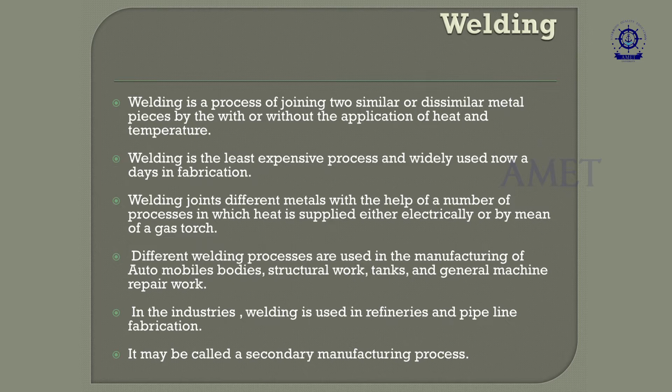As I already discussed, it is a very least expensive process and widely used nowadays in fabrication. Welding joins different metals with the help of a number of processes. Heat is applied either electrically, by means of a gas torch, or by means of a welding torch. Different welding processes are used in manufacturing of automobiles today, starting from gas welding, starting from arc welding, and nowadays there is a lot of advancement in welding taking place in automobile industries, nuclear industries, shipbuilding industries and space shuttle industries, which we will be discussing in this lecture.

Nowadays industries especially use welding processes like friction welding process and friction stir welding process, and mainly ultrasonic welding process, used in different oil industries and piping industries. It is one of the largest and major secondary manufacturing processes.

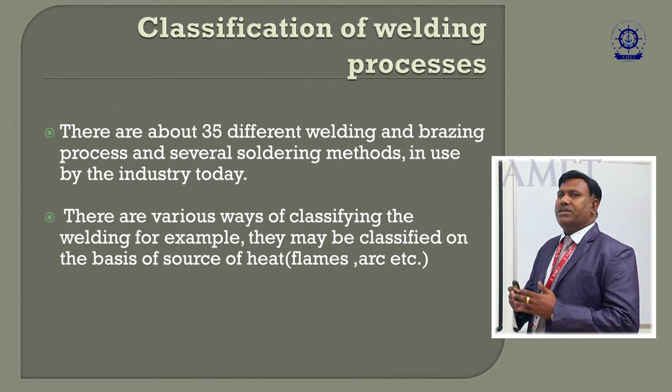If you consider the classification of welding processes, welding is majorly classified into 35 different welding and brazing types, and several joining processes like soldering are methods used in different industries. There are various ways of classifying welding, for example, they may be classified on the basis of heat sources applied. There is flame welding and arc welding used for industries, and in general there are different welding processes.

Gas welding is one major classification. We have air acetylene, oxyacetylene, oxyhydrogen welding, and separate oxygen and acetylene put together in the welding process. We get different flames by mixing oxygen with acetylene gases.

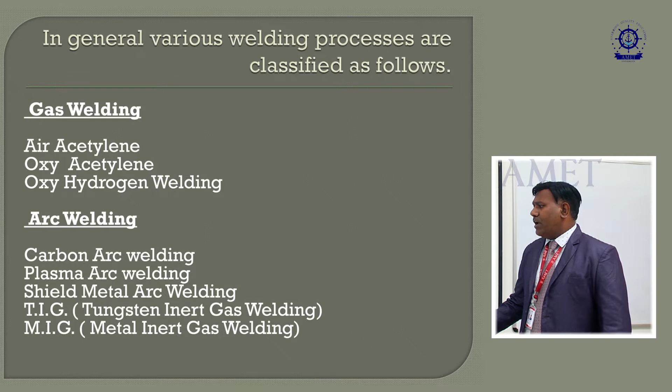Another major classification in welding is arc welding. We have different arc welding processes - let us see one by one. These are the major arc welding processes used in industries: carbon arc welding, plasma arc welding, shielded metal arc welding, and TIG welding. TIG stands for tungsten inert gas welding and MIG stands for metal inert gas welding. These two processes are widely used in different industries and in joining different non-ferrous alloys.

Next we have the major classification of resistance welding. Resistance welding comes under the category of pressure welding, and we have spot welding, seam welding, projection welding, resistance butt welding and flash butt welding. These weldings are used especially in automobile industries - for example, in automobile door industries and car door panels, spot welding is used.

The next major classification of welding process is solid state welding. This is nowadays used widely in all major industries. For example, we have cold welding, and diffusion welding is one of the latest welding processes in which joining of different types of non-ferrous alloys, ferrous materials, as well as plastics and other materials can be done. Forge welding is another type, along with fabrication welding, hot pressure welding and roll welding. Today we are going to discuss friction stir welding.

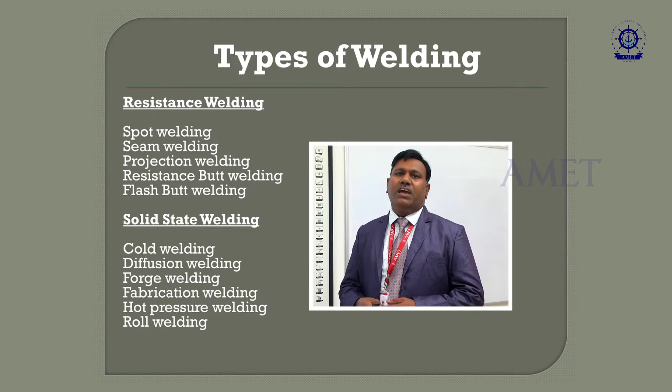Let us see another major classification of welding, which is unique and can be considered a special welding process. For example, we have thermochemical welding, which includes thermite welding and atomic welding. Thermite welding is used in joining railway tracks, where men work under the tracks making a weld with a cone shaped mold where aluminum and iron oxide is put together and fused, allowing heavy sections to be joined together.

Another welding classification is radiant energy welding, which has two major types: electron beam welding and laser beam welding. These two types are very important in industries nowadays, because laser beam welding allows you to weld even very thin sections of plates with very little thickness. Other applications of laser beam include different medical applications, including human surgery.

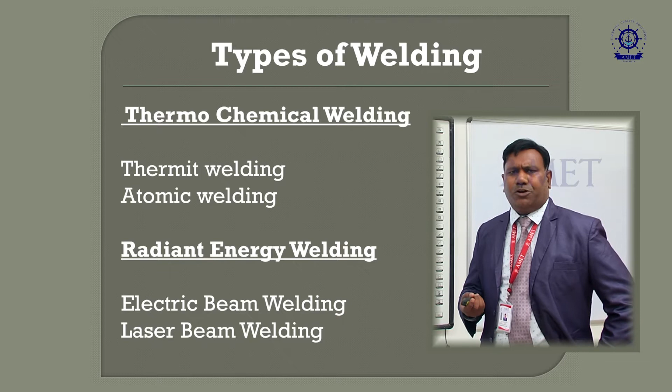We will now see the different welding joints used in industries nowadays. For example, in normal butt welding, we put two plates together and make a weld. It's normal welding used in different industries, and it is a major type of welding joint.

And we have a lap joint. What is a lap joint? It is nothing but placing two workpieces one over the other. This is called the lap joint, which is used in industries. And we have a corner joint, where you put pieces together and make a weld over the corner.

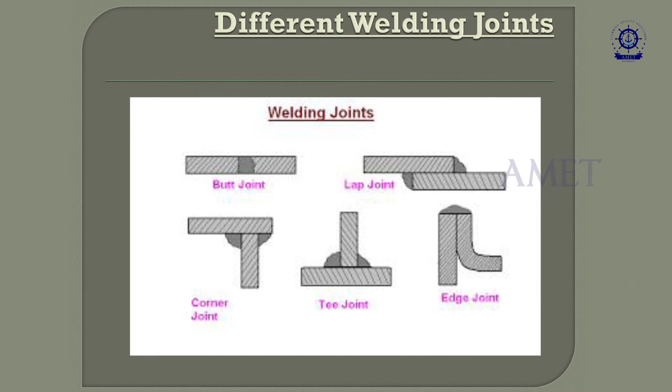And what is a T joint? A T joint is this type of structure, which is welded and used in many manufacturing applications. And edge joint, as I mentioned, has a position like this, which can also be called a corner joint. These are some of the few joints used in industries.

There are other types of joints also used, but we have shown only a limited number in our presentation for now. Next I am going to discuss the different welding positions used for different applications.

For example, flat welding, which I discussed, is like a lap joint where the workpieces are flat on the surfaces and you have a weld bead. So you have a single V groove and then you can make this flat welding.

This welding you can call vertical welding. Suppose you want to make the section to be welded in this position, this is called vertical welding.

You also have a number of welding directions. For example, forward welding, where you make the weld from top to bottom, and welding from bottom to top.

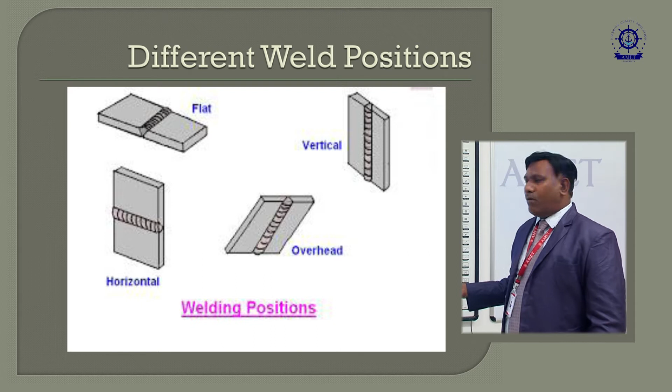We have a third position called horizontal welding, in which the welding starts from here and you move the torch from this place to that place. In some rare cases we use overhead welding, in which the operator has to weld on the top position of the structure. These are all the different types of welding positions.

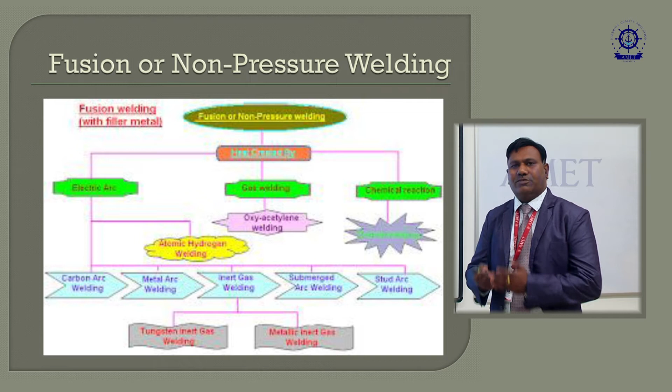Now we come to the main topic of friction stir welding. So far we've discussed the basic types of welding and the traditional classification process used in industries.

But nowadays a lot of improvements have been made in welding. For example, ultrasonic welding and diffusion bonding are promising areas that industries are looking into, because this is very important.

You can join without a filler rod, and it's an eco-friendly welding process where you don't face any arc glare, dust, or flames. There is no flame at all. It's a purely eco-friendly welding process, like a machining process where the tool penetrates into the workpiece and joining takes place.

Friction stir welding is nothing but a solid state welding process. What is solid state welding process? It is one in which the material does not reach melting temperature. Below the melting temperature, the joining takes place, which is called a solid state welding process.

It uses a non-consumable tool. We don't use a consumable electrode to join the workpieces, and without melting the workpiece you can join the material. Heat is generated by friction between the rotating tool and the workpiece material, which softens the region near the FSW tool.

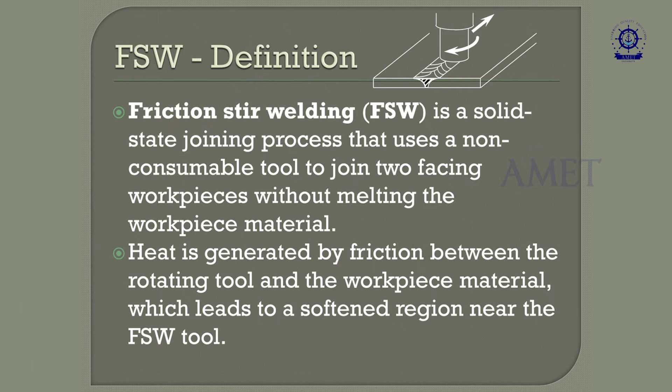For example, these are the two workpieces and this is the tool. We rotate the tool and penetrate into the workpiece, and then the tool moves slowly to make the joint over the workpiece, which is called friction stir welding.

With friction stir welding, we can weld different combinations of alloys, even when the temperatures of the two parent materials are different. So industries are trying different types of material combinations for joining, for example aluminum with copper, steel with aluminum, copper with steel, and different composite alloys are nowadays used for joining materials.

Even people are trying with the joining of polymers also. Polymer is very difficult to join because there is no proper technique for joining polymers available. So this type of friction stir welding and diffusion bonding techniques are very much useful for joining polymer materials.

So we will see what is friction stir welding. It is capable of joining aluminum alloys, copper, titanium alloys. Titanium alloy is a very hard material that can be joined even in this process of friction stir welding, and also mild steel, stainless steel, and magnesium alloys.

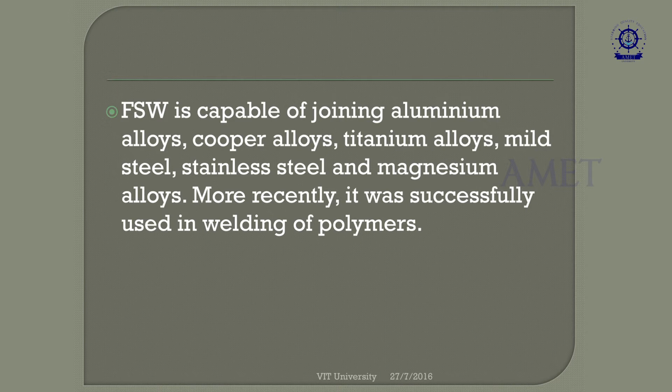And we have magnesium alloys also. Magnesium alloy has an ignition property, so that can be avoided. In conventional methods it's very difficult to make a joint, but magnesium can be easily joined by the friction stir welding process, and it was successfully used in different ways of joining polymers also.

In friction stir welding, the different parts to be joined are clamped firmly, because when the tool is penetrated into the workpiece it should not move away from the fixture. So it has to be clamped firmly, and a rotating hardened steel tool is used.

So here these are the two metal pieces, the parent materials. These parent materials are to be fixed and clamped properly on the fixture, and then a rotating tool member, say for example a mild steel or hardened steel tool, is driven into the joint and traversed along the joint line between the parts, as I already explained with the two parts in this lecture.

And the rotating tool produces friction with the parts. The friction will be made over the tool shoulder here, which affects the material like this. A weld bead can be formed over this region, which is nothing but the tool inserted over the workpiece, generating enough heat and deformation to weld the parts together.

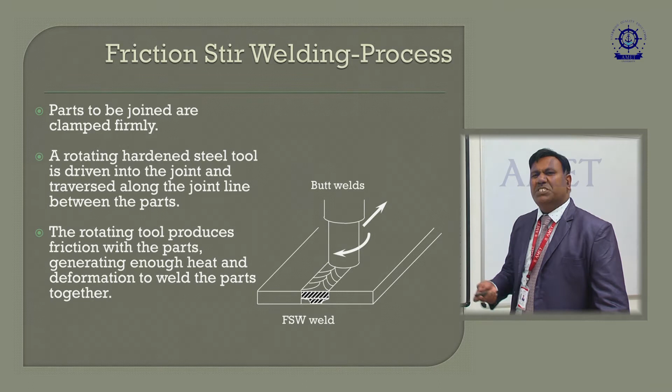So as I discussed already, these are the 4 stages into which the friction stir welding clamping method is classified. In step 1, we have the clamping method, where this tool is inserted over the workpiece. Then in step 2, the tool is rotated, and a pull-down force, called an axial force, is applied over the material in the rotating condition.

In step 3, we have full penetration of the tool pin over the workpiece with the help of the rotating movement itself. And in the last step, you have the full rotation of the tool as well as the traverse feed given on the table, so that the tool moves slowly over the workpiece material, which completes the weld.

The working principle of FSW welding involves a cylindrical tool. For example, this is the cylindrical surface of the tool which makes the weld. A shoulder tool with a profiled probe is rotated and slowly plunged into the joint line between the pieces butted together, so frictional heat is generated between the wear-resistant welding tool and the material of the workpieces.

So we have different parts. This is called the shoulder region, and this part of the weld is called the advancing side. When the tool rotates in the clockwise direction, we consider this section as the advancing side and this side as the retreating side of the weld, and we have trailing edges of the rotating tool in which the tool fully penetrates the material surface.

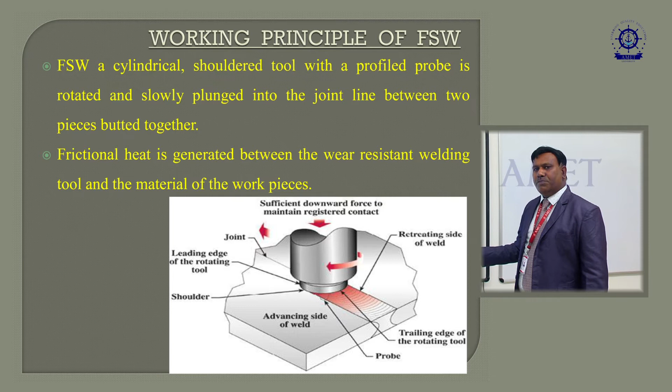So this is called the tool probe, and the leading edge of the rotating tool, and this area is where the joint is made, with sufficient downward force to maintain pressure on the tool material, also called the axial load of the weld, which can be measured.

So the heating is produced without reaching the melting point, which is called the solid state welding process, and this allows traversing of the tool along the weld line. Next is the pressure: the plasticized material is transferred between the front edge of the tool and back edge of the tool probe, and it is forged by the intimate contact of the tool shoulder and pin profile.

So in this friction stir welding, the shoulder diameter as well as the tool pin profile are very, very important.

Suppose if you are taking a 5 mm thickness plate, you need a 4.8 mm thickness tool pin, which is used for stirring the two metal pieces for joining. Also, the tool shoulder must touch the top surfaces of the workpiece, so that a penetration, or the impression of the tool shoulder, will be placed over the material and the joining will take place.

In the final section we will see two videos of the friction stir welding process. These are the main parts of the friction stir welding process. As discussed, the tool is rotated in the clockwise direction and welding takes place on the base metal. There are different zones observed after welding, since the material is not fused together - it is not a fusion welding, but has different regions that can be observed.

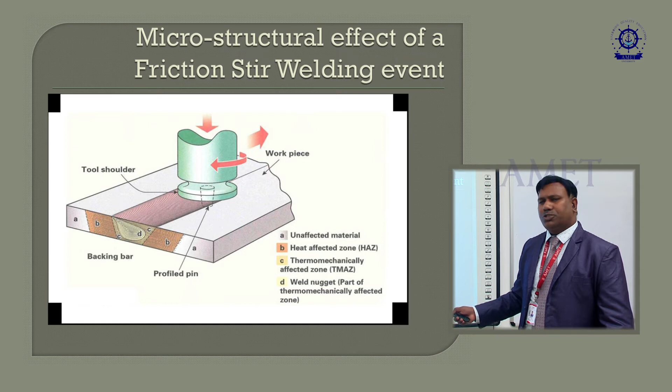In our investigation of microstructure analysis, both macro and micro, this region is taken into account for the results - how the weld turned out, whether there are any cracks or defects in the region, and any changes in the grain structure, such as fine grain formation, that can be analyzed in this material. So these are the four regions in which friction stir welding can be analyzed.

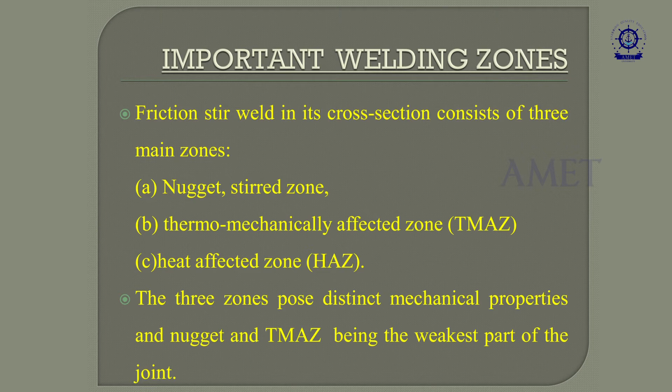The main zones we discussed earlier in the diagram are the nugget zone, also called the stirring zone because the tool stirs over the material there, and the thermomechanically affected zone and heat affected zone - three zones discussed in this region.

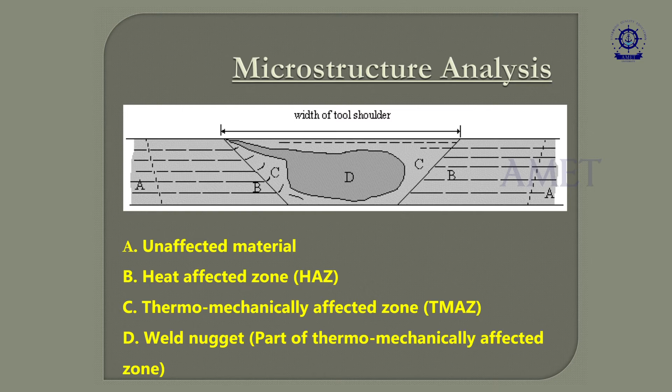This is another type of diagram showing the welding zone, where the welding microstructure analysis can be done. Here micrographs of different regions, like A, B, C, and the stir nugget can be viewed. The factors affecting weld quality include the type of metal and the type of base material or alloy being used.

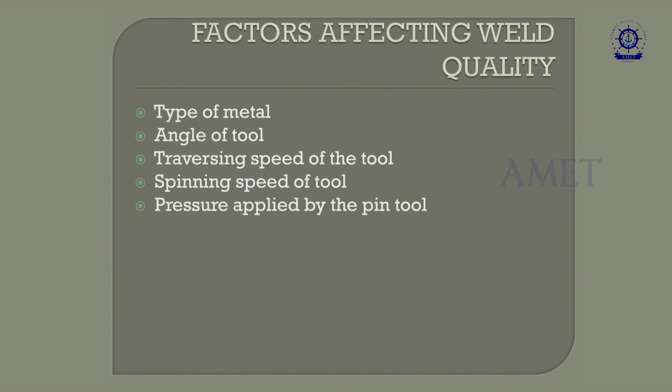The angle of the tool is also very important - sometimes a tilt angle is used and sometimes not - along with the traversing speed of the tool, which can be considered as welding speed, the spinning speed or rotational direction of the tool, and the pressure applied by the pin tool, normally called the axial load.

Nowadays aluminum alloy is used for major joining processes in this welding, and friction stir welding of steel is now made possible due to the development of tools made from polycrystalline cubic boron nitride, which I discussed as PCBN, with tool design constantly being improved to extend tool life.

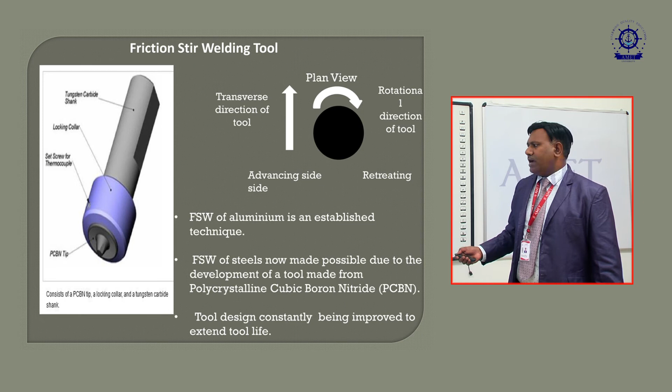We also use mild steel, but sometimes very hard workpieces or base alloys require such tool pins, like diamond tipped or PCBN tools, to be used for making the joint.

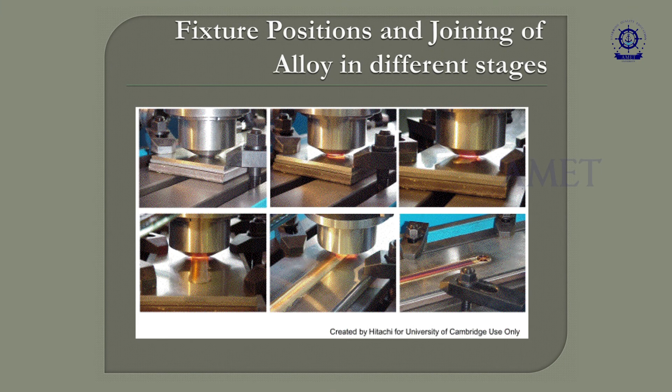So next is the fixture position, which I discussed already. These are the different fixture positions in which the tool rotates over the metal pieces or base alloys. See here, you have a red hot condition of the joining process, but it is not a fusion process in which the material gets fused together. It reaches below the melting temperature, and the joining takes place over the different regions of the material. This is the welded workpiece of aluminum alloy after the weld.

And the tool parameters - we have different parameters of the tool based on which it will be designed. For example, length of the tool and pin profile - what type of thread you are giving, whether it is cylindrically profiled, circular type, or cylindrical type tapered with threaded pin profile. What type of profile is needed - square, hexagonal, pentagonal, or square type of profile. We used to test it with different tool profiles to see what will be the strength of the weld.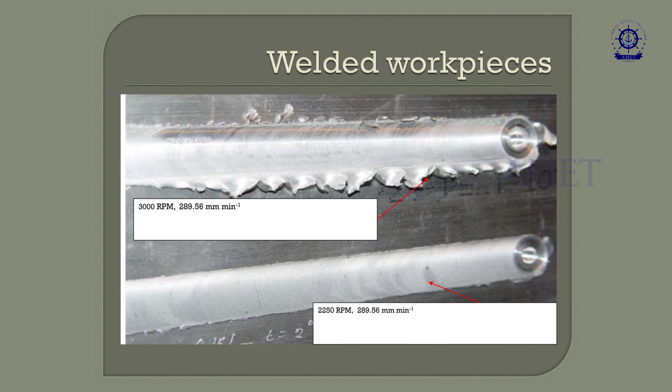The tool is strong enough, hard wearing at welding temperature, has good oxidation resistance and thermal conductivity. These are all the different features of tool material, and the hardness is selected based upon the type of base alloys that you are going to weld.

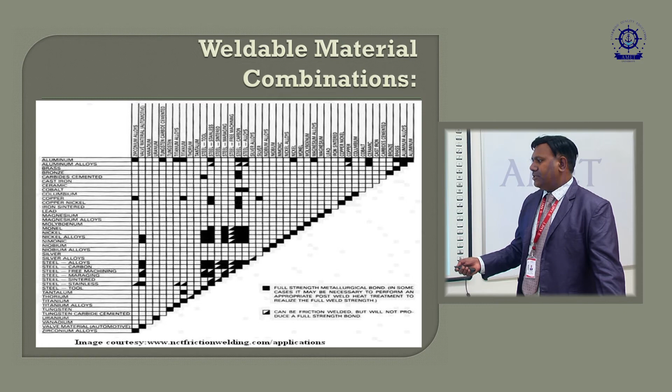But in our country we have a limitation over the joint, since we do not have that much advanced facilities like what other countries are having. Those countries have very advanced and sophisticated robotic machines for joining friction stir welding parts, like those used in different rail and shipbuilding structures and other applications.

We have the material suitability, as we discussed earlier through the chart. We can join copper and its alloys, lead based alloy, titanium and its alloy, magnesium alloy, zinc, and plastics through this process. Then mild steel, stainless steel, nickel alloys, and different types of polymers - that is also possible.

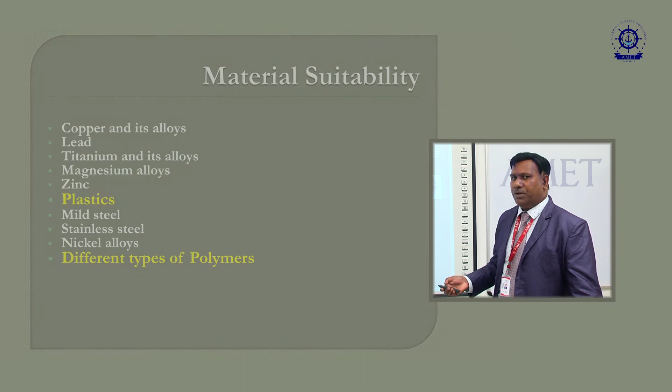And here we have a common tool structure - what are the types of tool, different tool structures that can be used? What we discussed in the previous slides was a normal tool, but we have different types of advanced tools also used in friction stir welding process.

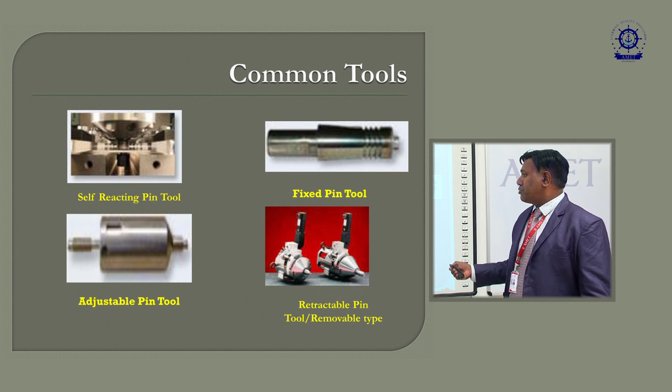This is a self reacting pin tool, this is a fixed pin tool, this is an adjustable pin tool, and this is a retractable pin tool. So these are all the advanced types of tools which can be used in joining friction stir welding.

And here this is the friction stir welding machine used by ESAB, the company called ESAB. They are using a Super Stir TM machine, FW28. Here there is one more machine also called ESAB machine, which has a very big structure and can be used for heavy sections also.

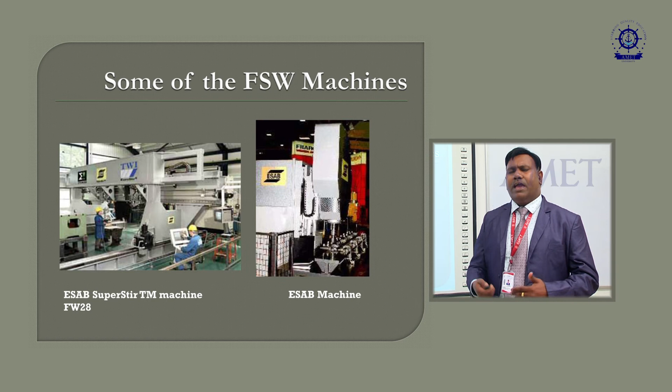And next we have a general example of what normally people are using nowadays for research purposes. This is one of the friction stir welding machines used for college purposes, and this is the normal welding tool, and this is the welded part. These are the different tool profiles we discussed earlier, and this is the tensile strength material that is cut from the base alloys using the ASTM standard, which can be used for checking the mechanical properties of the material.

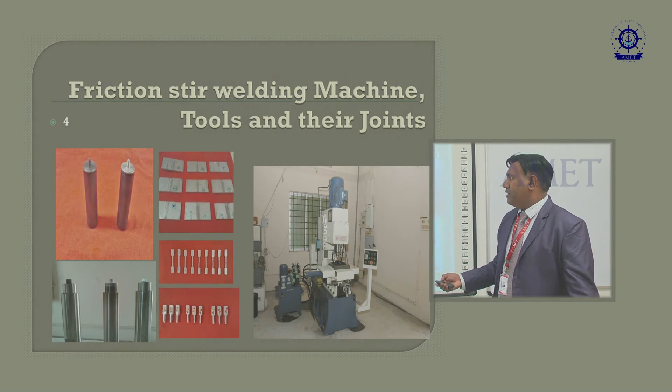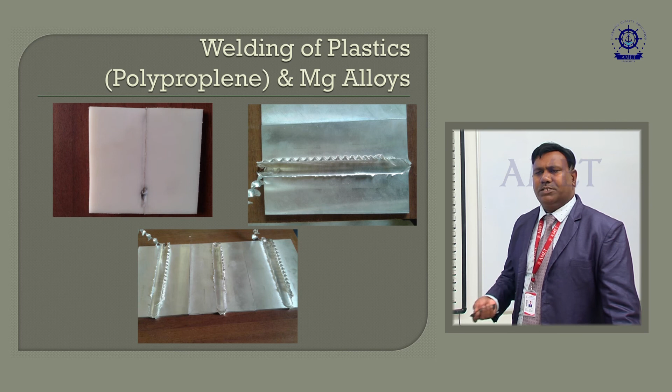This combination of trial and error method can produce good welding over different plates. Selection of process parameters like traverse speed, tool rotational speed, and axial load are the important parameters for making a sound weld in this process.

These are other combination alloys like aluminum to copper, and this is magnesium. Again here, the combination of aluminum alloy to copper material can be joined.

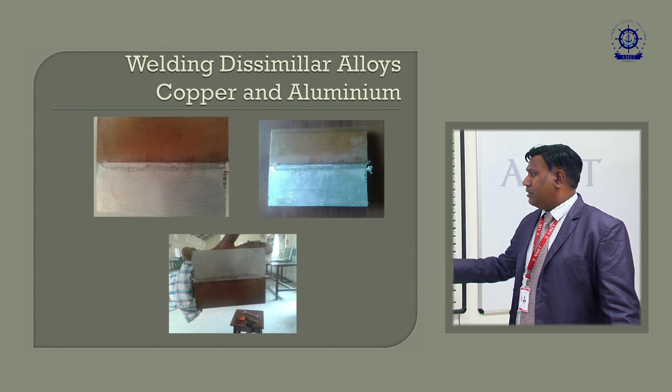So the current uses of friction stir welding machines are in aerospace, railway, shipbuilding, construction industries and others. When we move to lightweight alloys, we have aluminum, magnesium, plastics and even composite materials that can be used. This is an eco-friendly welding process.

The main area of use is shipbuilding. For example, friction stir welding was used to fabricate the aluminum panels of the superliner by Mitsui Engineering and Shipbuilding, and this can even be used in the SpaceX factory.

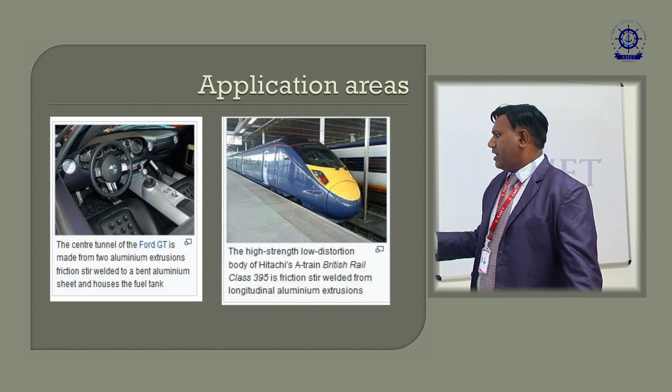Ford company uses this particular welding process in their cars, and this is the high strength, low distortion body of the Hitachi A-train British rail system, which uses the friction stir welding process.

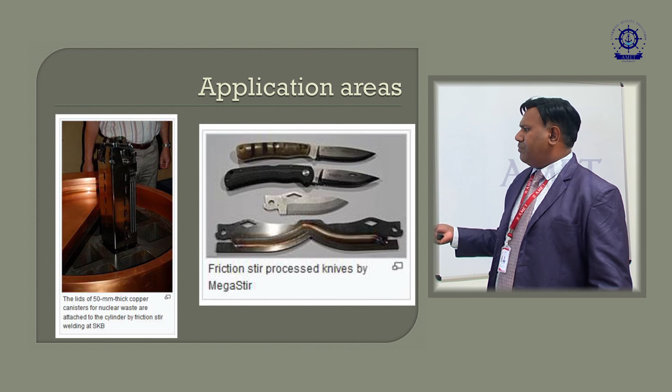Here is a 50 mm thick copper canister for nuclear waste attached to the cylinder by friction stir welding, and this is one of the interesting applications in which the friction stir process is used by Megastir.

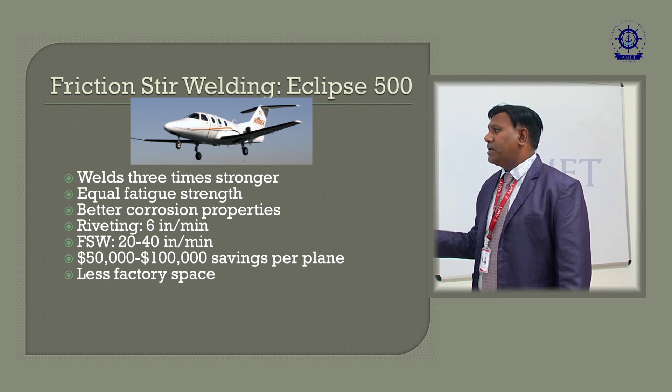And Eclipse also uses friction stir welding. The advantage of this welding is it welds 3 times stronger with equal fatigue strength and better corrosion properties. Riveting achieves 6 inches per minute, but in FSW we have 20 to 40 inches per minute, and you can save almost $50,000 per plane when manufacturing through this process.

The Space Shuttle utilizes this friction stir welding process, and Boeing even made a 15 million dollar investment in friction stir welding over the last 2 years.

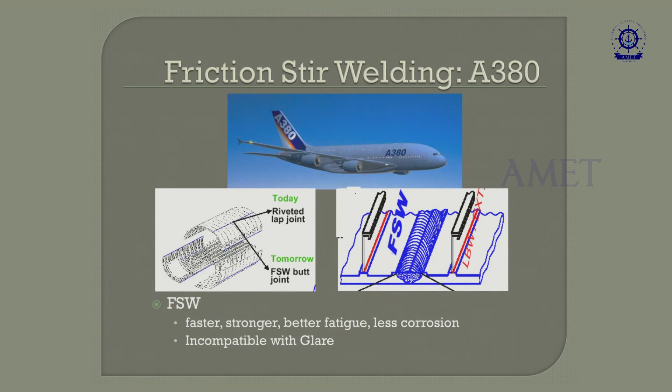We have friction stir welding used on the Airbus A380, which uses the friction stir welding machine that is very fast, stronger, with better fatigue resistance, less corrosion, and incompatible with glare. So today we are using the riveting process, but tomorrow we will use the friction stir welding process in a larger way.

Friction stir welding is used even in robotics. KUKA Robot Group has adopted the KR500 3MT heavy duty robot for friction stir welding. The Delta N FS tool is used, and the system made its first public appearance at the Euroblech show in November 2012. Even in personal computers, Apple applied friction stir welding on the 2012 iMac to effectively join the bottom to the back of the device.

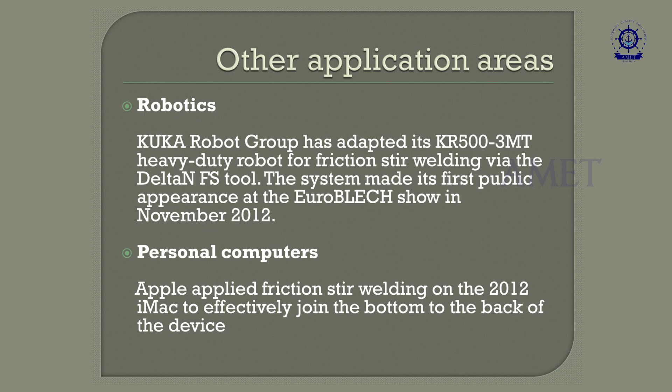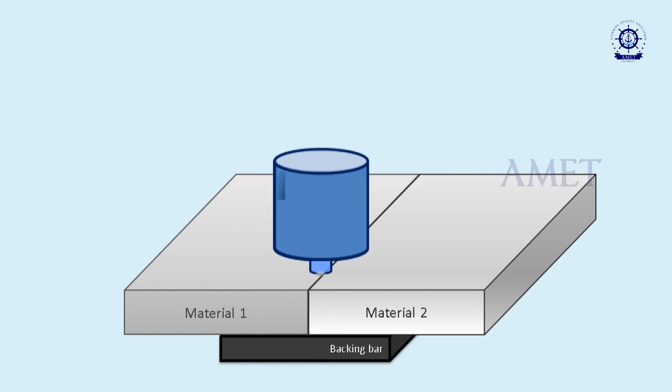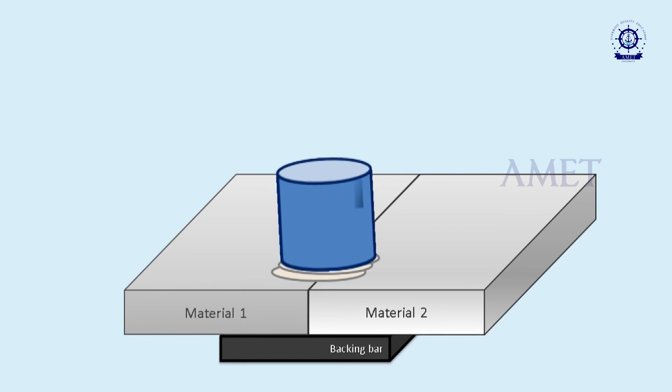This process is used, and we will see 2 videos of friction stir welding, and then we will conclude this lecture. In this process, the tool is penetrated over the workpiece surfaces, and we have a stirring action by the tool, and at last the tool is retrieved from the material. These are the process stages of friction stir welding.